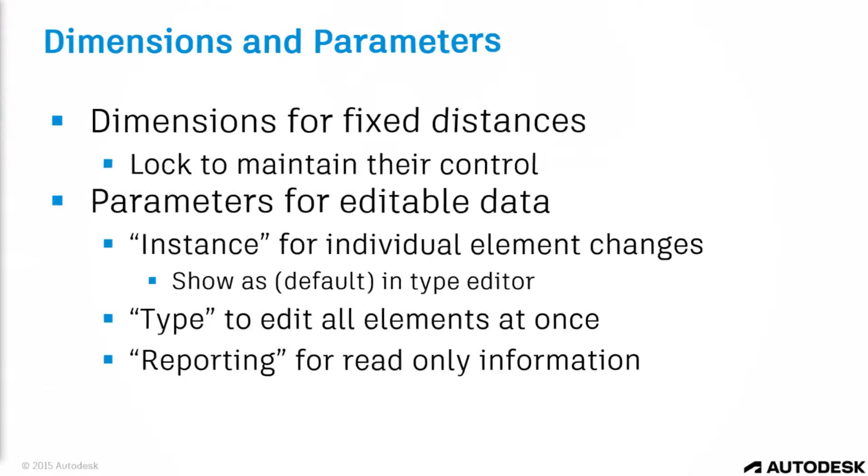So geometry, this is the object you place in your family, such as extrusion. Let me add some information regarding geometry. There are geometry types like solids and surfaces.

Revit works best with solids because they're easier to handle and control compared to other shapes. We have base shapes like cylinders and boxes. Extrude means it gives thickness.

If you have a shape, and you extrude it, it produces thickness. That's extrusion. Blend combines two different shapes, I'll give you a sample, okay?

Revolve rotates a shape. Sweep creates a shape on a path. Sweep blend creates two shapes on a path, okay?

So to make this easier to understand, let's go to the Revit file. Let me open my table tutorial to give you a brief, short sample on the shapes. This is the table tutorial.

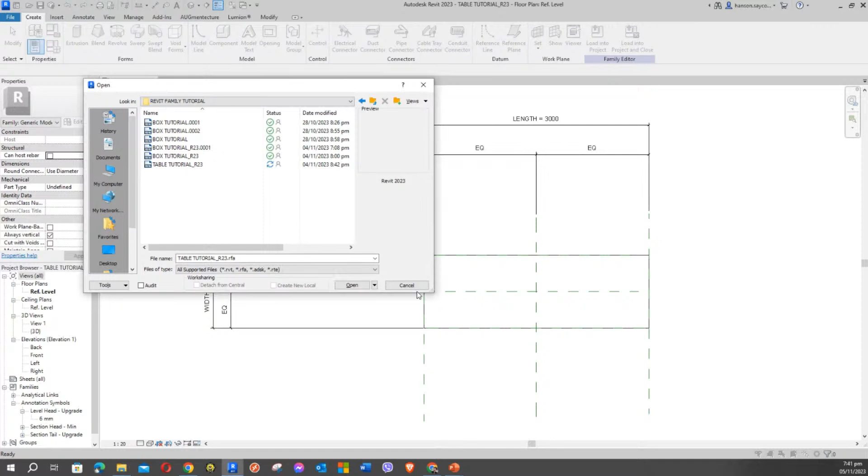My work from yesterday wasn't saved. Let me open my file again. So yesterday we added legs to this. Okay, I'll add that later.

For this sample, let's start with basic shapes for creating geometry. We are under the file named table tutorial, Revit 2023. This is the 3D view. For example, if we need a basic shape, we create an extrusion.

Once I click extrusion, it will ask, or by default, it uses the work plane, and we can see the work plane highlighted in blue. That's where our plane starts, the starting point. But we can also set a work plane.

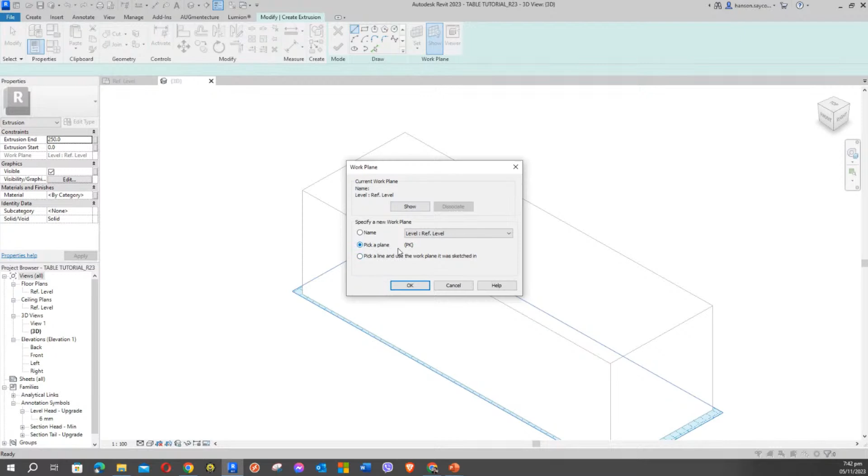If we click set, we can pick a plane, maybe I'll use this one. Notice that's the work plane now. Let me zoom in a bit just to give you an idea. This is the work plane, on top of this box.

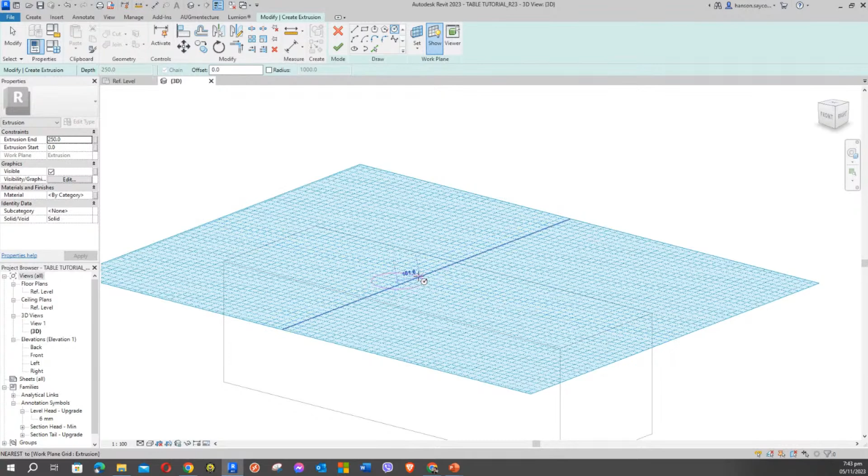Now we can create a simple extrusion. The basic shape can be lines or a series of lines that need to be closed, or we can use a rectangle, depending on the case, or even a circle. Once I close that, it's there.

By default, it starts from the plane and ends at 250, depending on the setting, but I can modify that and apply. Once we click OK, we have the extrusion - once there's thickness, that's the extrusion.

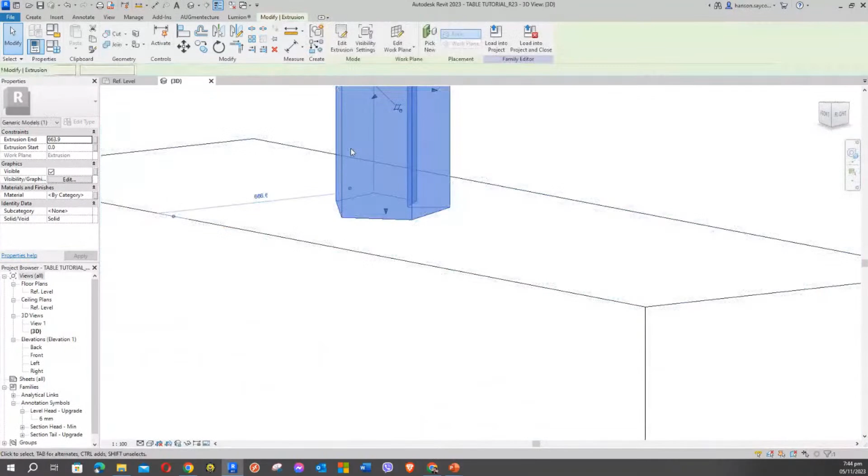So shape plus thickness equals extrude. In AutoCAD, it's also called extrusion. In other software, there's push-pull, similar concept. So that's the extrusion. How about the blend?

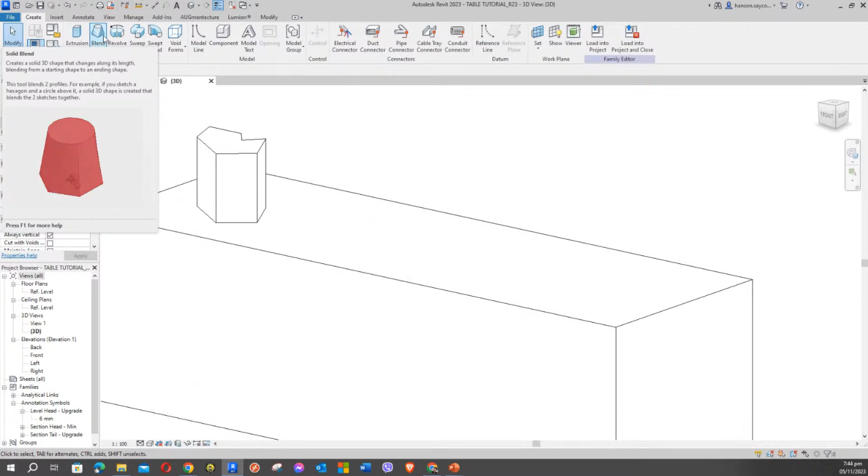Blend is creating a shape, but we have two shapes. Once I click, we're now editing the bottom shape. I can create that.

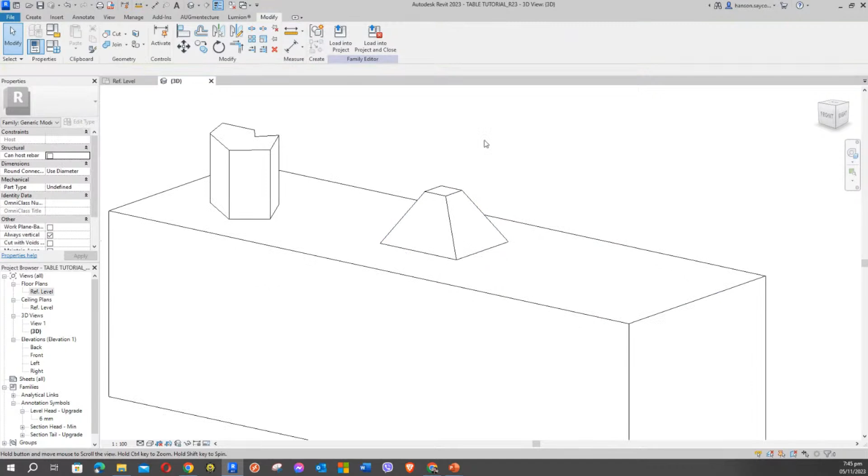If I need to edit a top shape, it's better to be in top view. I'll create the top view shape - this is the bottom and this is the top, and then I have some height. Once I click the checkmark to finish the model, it combines the two shapes.

So that's how it becomes a different shape. You can also modify it if you don't want that shape. To avoid getting misaligned, I'll just go to the top view and create this, and let it align there.

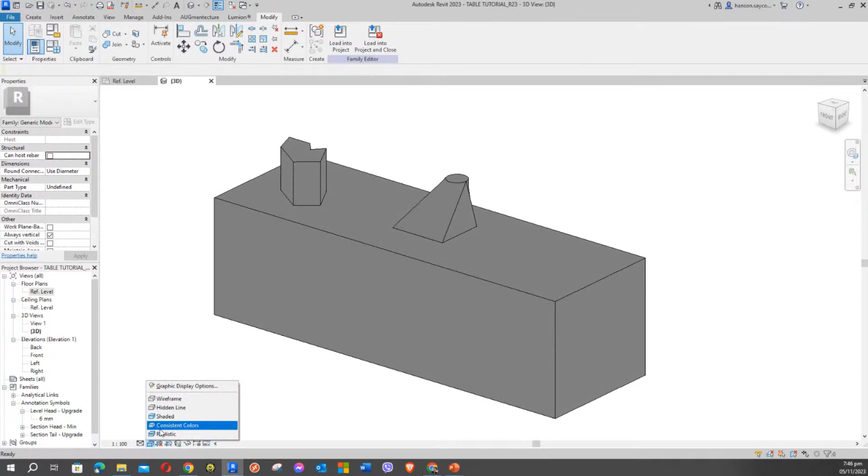I'm just changing this from wireframe - you can change this to hidden line, shaded line, consistent color, or realistic. But it would add to the memory load when you create shapes that are heavier, so using shaded or realistic adds to memory usage. I'll just leave it on hidden line.

So that is the blend. This is the extrusion, this is the blend. How about revolve?

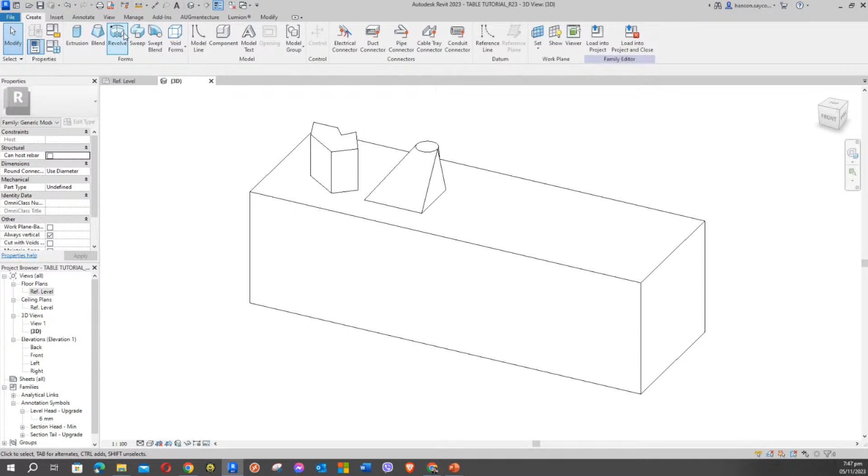Revolve creates a 3D shape by sweeping a 2D profile around an axis. So it's there. For example, if I go to the front view, I want to create a shape here.

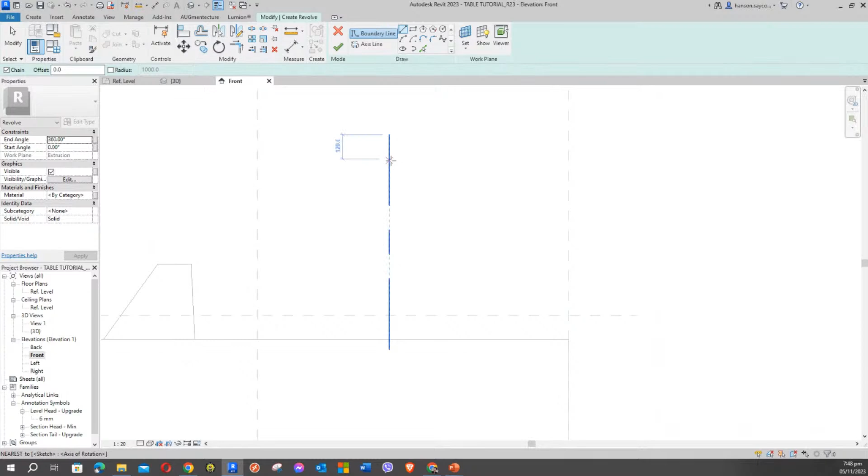I'll create an axis line first to define the boundary - it's like the mirror line. Then the boundary - for example, I'll just make some shape here.

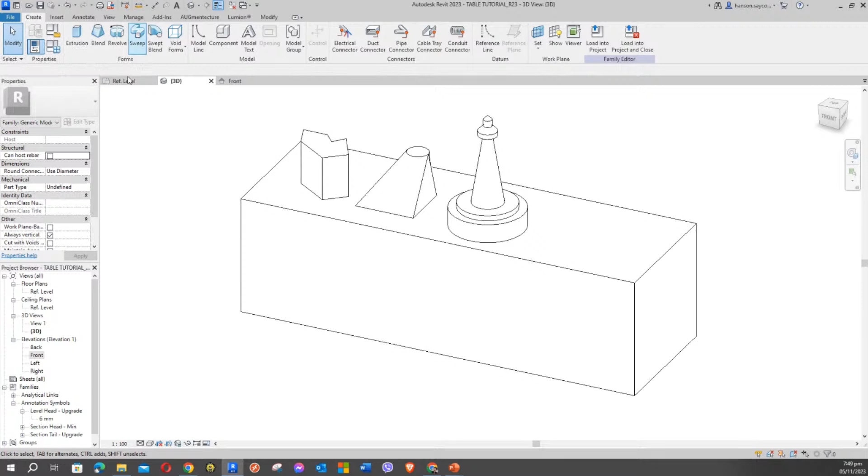Just click sweep, and it would ask for a path. Either we can sketch a path, or we can pick a path. I will just click pick path and edges, so it will be around this table or this box, to rotate the profile from there.

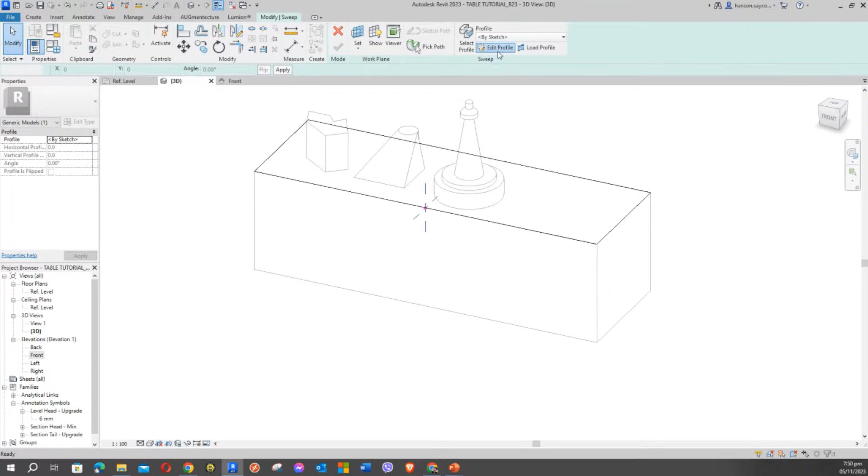Profile means it's just a 2D line that's closed. So I will just create one profile. Let's add a little curve, just the curve or the arc. Once I close this profile, then it will rotate like that.

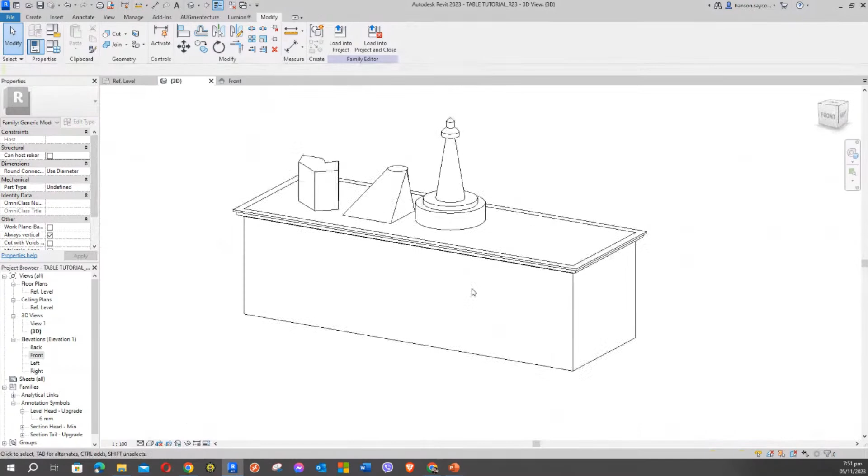To finish the profile, it will be like that. That is a sweep. So of course, this is dependent on the edge of the box. Whenever the box changes in edge or shape, it will follow along.

And the last one is the swept blend. It blends and sweeps along a defined path. Something like this, it's similar but with different shapes. There's a first, a beginning and an end, but it should be one piece.

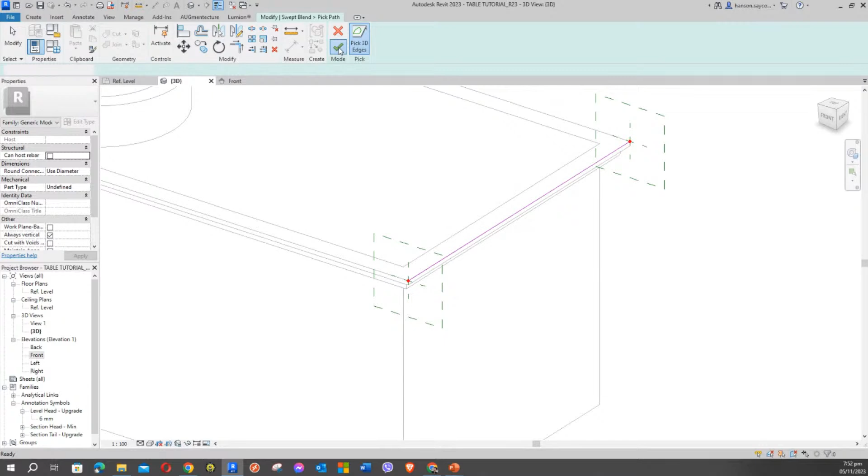For example, let's click swept blend, pick path. I will click this, so we'll have two profiles. Then it would ask me to select profile one. If I click this and edit a profile, for example you have this profile, then let's add another profile here.

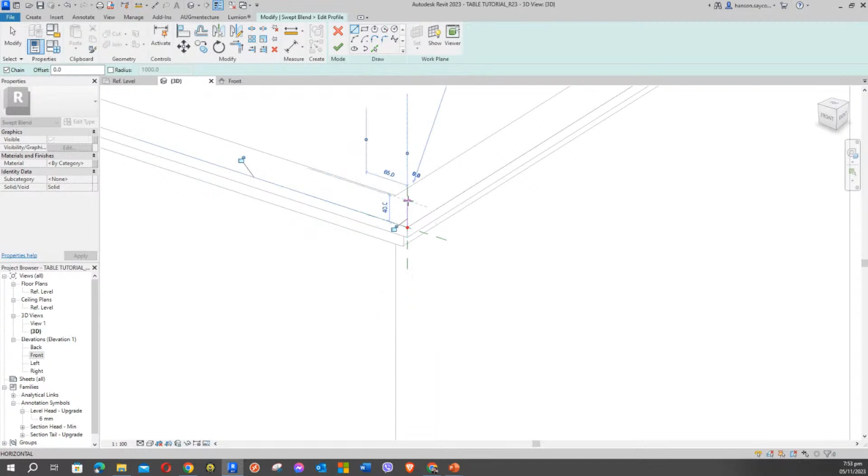Let's change the shape. This one is okay. So this is profile 2. Let's see what happened. Let's curve one of them, I mean just the slope. So it would combine those two shapes.

Once I'm done, that's it. So the shapes are different, in one path.

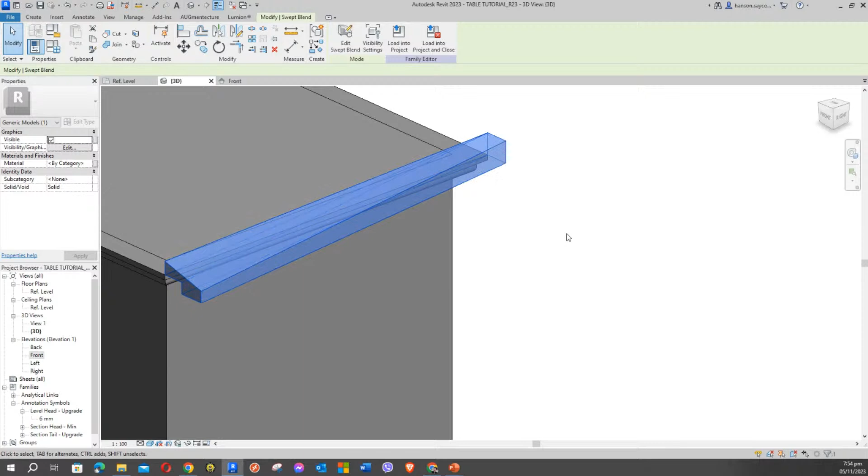So that's the basic shape editing. And then we have some other forms that you can add.

Void, actually, it's just the opposite of extrusion, but once you put a void on an object, it cuts a hole into that object.

For example, maybe I can create a void extrusion from this, let's see, extrusion here. Once it's defined that this is a void, it cuts into that object.

That is basic shape. Now you can use this in doing and creating objects in the Revit family.

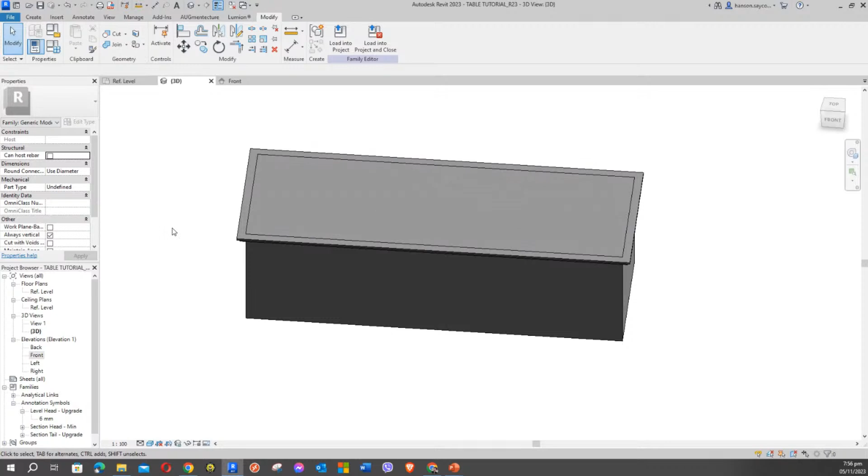If you have some questions, you can shoot them so I can read them while we're doing this. Type your question now, because what I'm going to do is, on the fly, explain quickly how I'll add my legs since the box, the legs, got lost. I don't know why, I probably didn't save it.

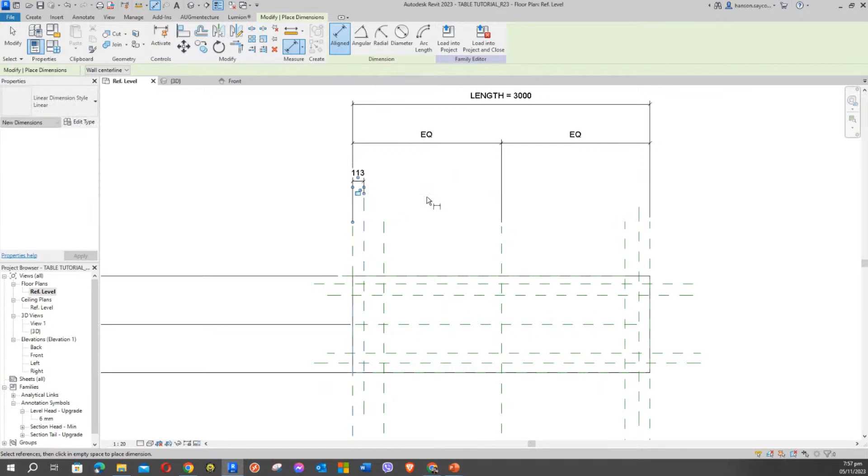So lesson learned, always save your work. Right now I'm creating a reference plane offset for the side of the legs, and another reference plane for the size of the legs, the thickness or width. After that I'll click this, this is the side offset, so I'll just adjust that side offset.

Okay, and another dimension for this and that. And another dimension, just need this dimension from here to here. So I need to create and assign that to a leg, this leg edge offset.

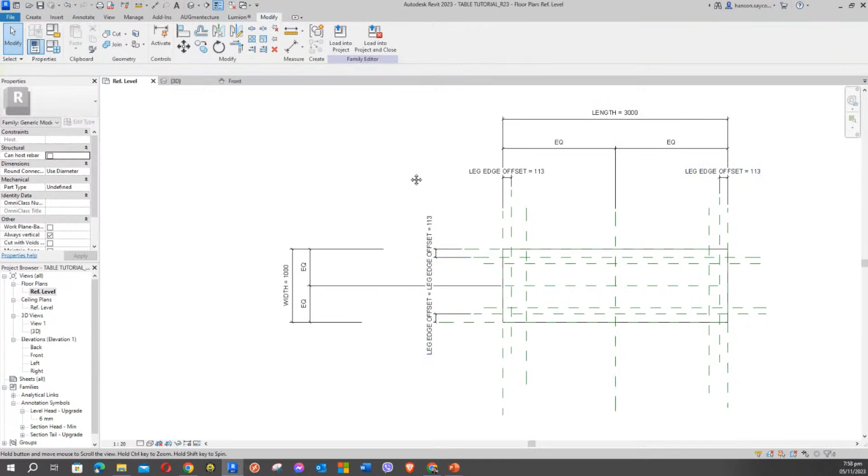Just to assign those, I'll select this and assign the leg offset. Now to check if that works, let's say it's 50, apply. If that moves, it means it's okay. I'll rename this as my table, and delete the others for now.

Delete. I'll move that table there. And then, so that's the thing I did yesterday.

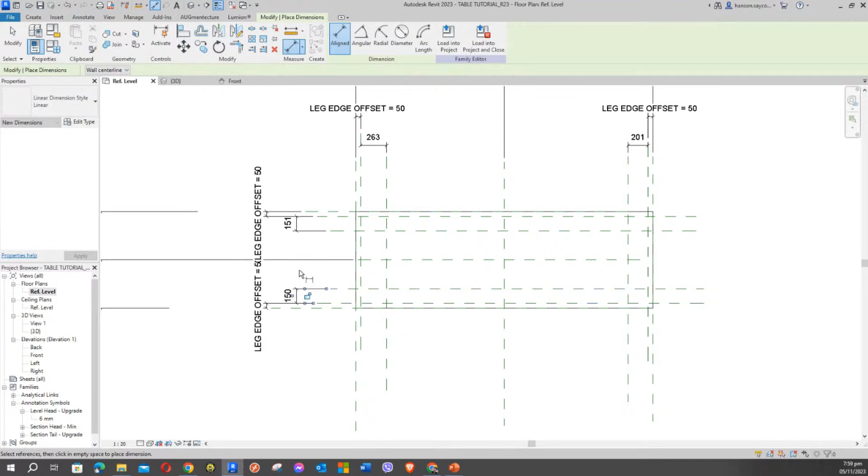I'm going to assign the size of the legs. So from this edge to that edge, that will be the leg size. So I need to add another parameter called leg size, and assign the rest to the same leg size.

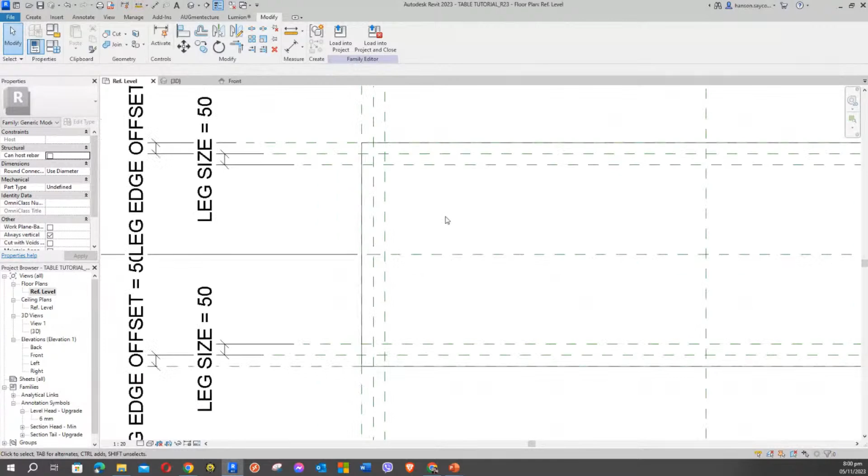Leg size. Okay, let's adjust the leg size to 50. If that works and everything is okay, then it's fine. So that's our imaginary legs here in the middle.

I need to create an extrusion, and I'm going to lock this so it stays locked. So I need to create 4 extrusions that are locked. It's important that they're locked because if you miss a line that isn't locked,

sometimes they will not follow the shape or the location. So we need to lock that. If you're confident, I can finish that and it would end on the extrusion at 500. So the height of the legs will be 500 by default, but we can define that. So these are the legs now.

Let me just go to the front elevation. This front elevation, just to verify this is the legs. Okay.

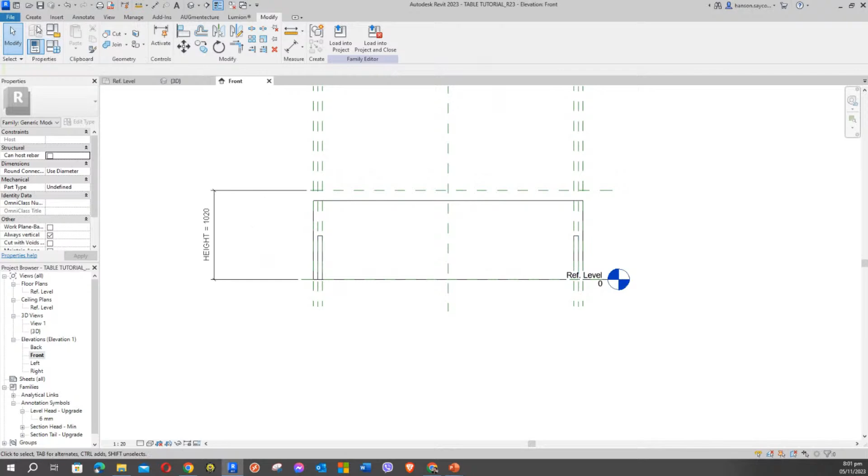Now I'm going to create another reference plane on the front view. This is for the height of the leg, so it's the leg height. I will just create another dimension coming from this reference level to that, and I will call this dimension and add another parameter, and we'll call this leg height. So that is the leg height.

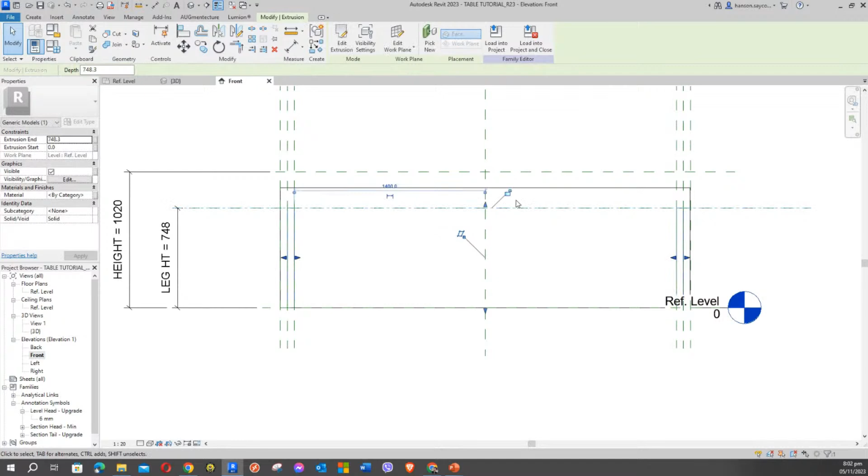Now I need to lock these legs. So, these are my legs. I will just move it, and once it reaches this reference plane, I'll constrain it, lock it there. So now it comes out. It's locked. Now, to check if this is working - let's see, if I change the leg height, let's say 800, it should follow, so it's okay.

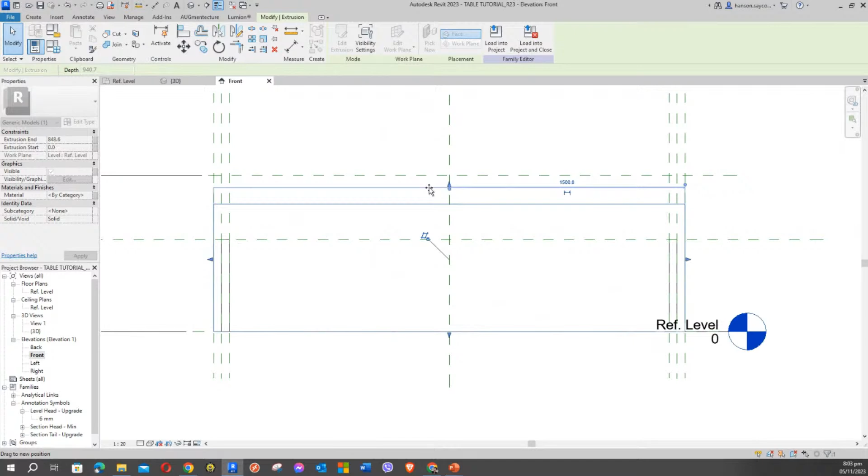600. Okay, so that means it's fine. Now, one thing - the height of this is the table height. It's not locked yet, so I'm going to lock this and click that. Just to check again, if I make our height 1,000, make it 1,500, if it follows, then it's okay.

Now I would like to make this box the table. So I'll remove the offset at the bottom. I'll raise it, and then I will constrain this to that - to that height, the leg height. That means the bottom of this would be the edge of the table. So I'll just click it.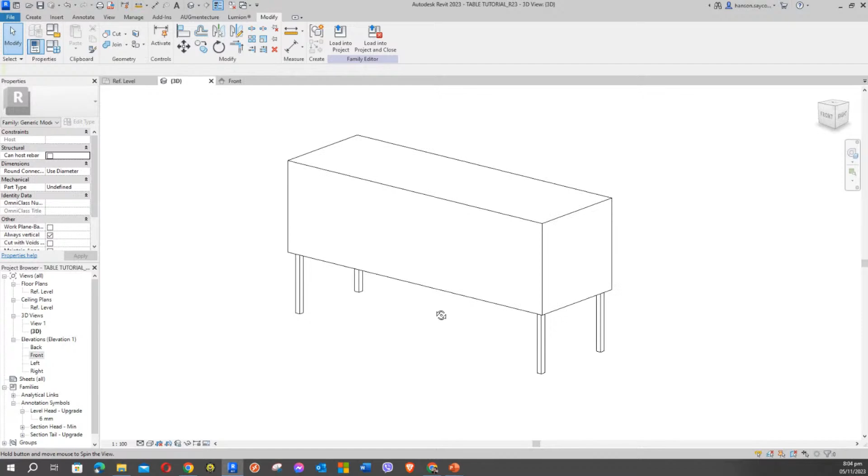Just to verify if it follows. Let's see, let's see. So just to check the flexibility. Okay, let's go to 900. Let's go - the height of our leg is 800. So it's okay, it follows.

So I don't have a problem. What if we offset this to 100? It goes in, so that adjusts. And then the leg size, let's thicken it, 100. So you can see, we're putting those parameters to make it somewhat flexible. So if nothing funny is happening, it means it's okay. If it's okay, then it's good.

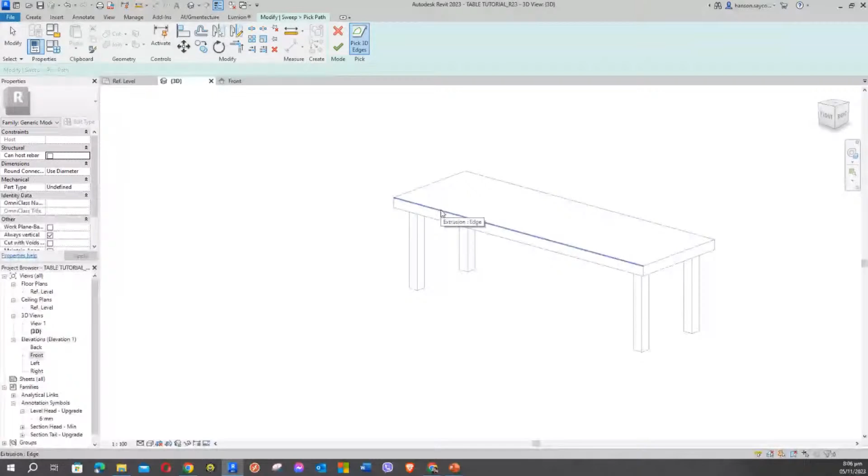Now we can add some other details, like we can create those extrusions - a sweep. We can create a sweep from there and have those sweeps around it. So the sweep is dependent on the top edge of the table. So whenever the table changes height, it will just follow as long as it's looking for these four edges. Now, if the edge changes or becomes unusual or the edge is lost, it means the extrusion - I mean, the sweep will fail.

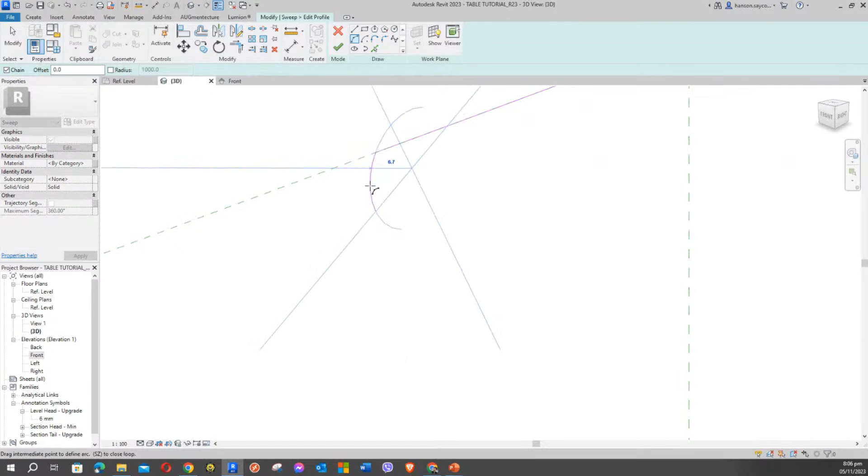So it will disappear. So I will just make something simple - a simple shape like moldings or something like that. It should be closed - there. The profile needs to be closed. So once that's done, it would have some design.

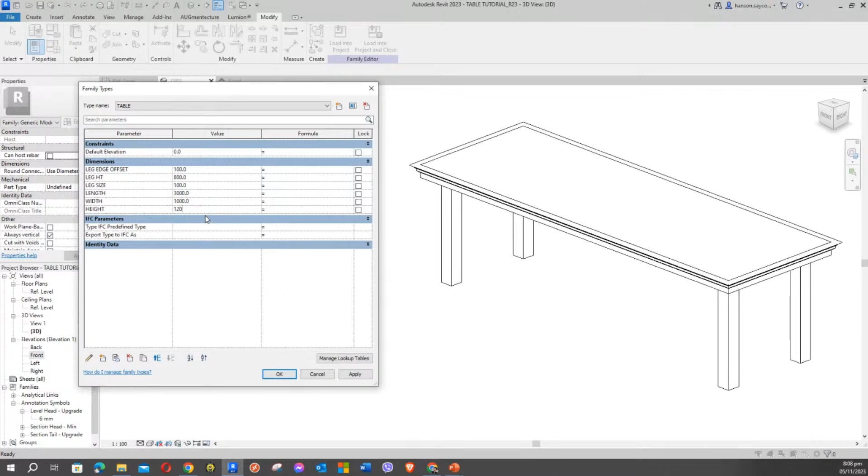So let's check if it follows. Just a little bit. Yeah, if our height changes. Okay, so it does follow. So it means it's flexible. And then we can use that.

Let's use 50 - leg size is 75. Height is - let's make the height 900. There. So it's flexible, right?

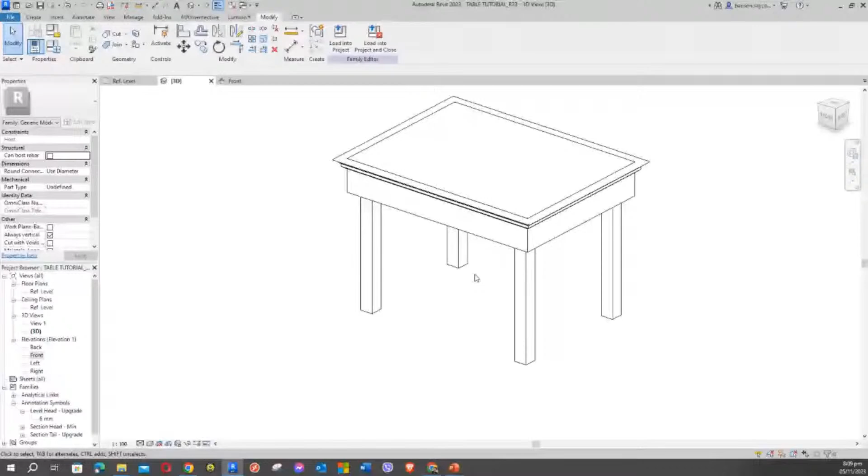So there's a warning: extensive use of large models can affect your computer's memory. So as much as possible, we discourage too many curves, too much detail, because the file gets heavier as the information increases. What is the ideal size? Usually, it depends on the shape, depends on the model, because the model can go as big as possible.

So what is practical? As some say, just use boxes as much as possible - simple boxes with extrusion. If possible, that is okay. Only when needed, if you really need to add details like curves, that's unavoidable because as the work progresses, you will add a lot of details.

For example, if we're looking at light fixtures - the lamp - it can be simple, just two lines of a circle or an extruded circle, like a thin cylinder. So we can represent that as a lighting fixture, depending on how you are looking at that particular model or drawing. Let's just get an example to make it clearer.

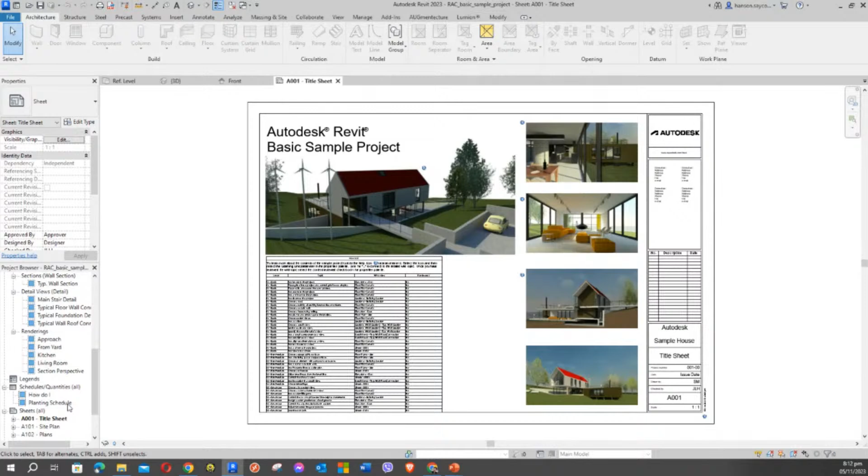Kasi by default, so if I'm going to get, hopefully if I get some, wala siyang lighting fixture. This is the plan, site plan.

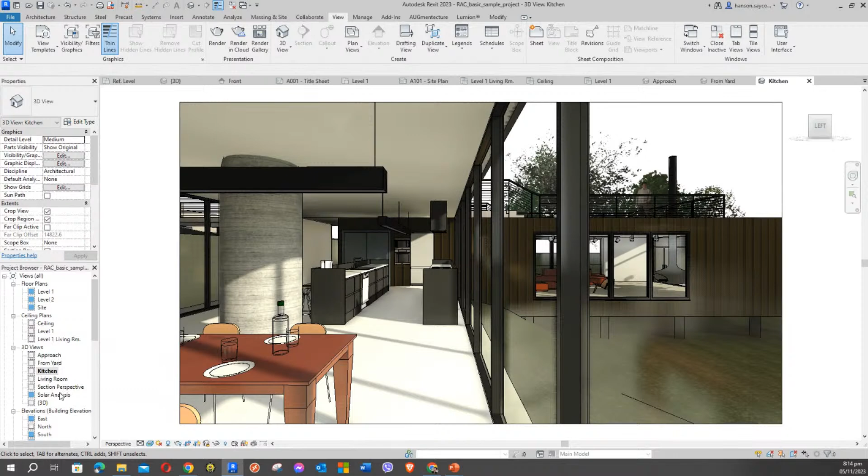So walang ceiling plan. Tignan ko lang yung view niya. And let's see. Mabigat. Wala akong makitang ceiling plan. Wala siyang ceiling plan.

Create lang ako mabilis ng ceiling plan. So I'll just create a ceiling plan on this part. So yung height ng ceiling ko is 2.7 from the finished floor. So I'm assuming it is there already.

And then I would like to insert a lighting fixture, kung ano yung meron dito. Okay, so it says that this one. Hindi lumalabas yung...

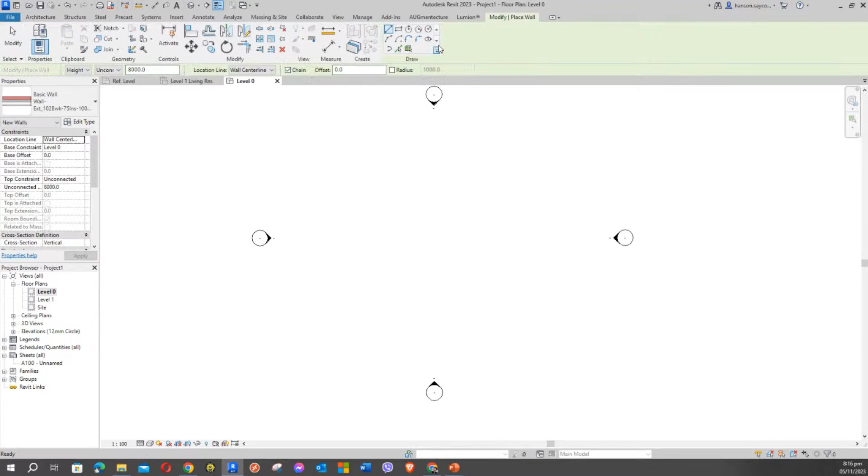I'll just create one quick project. So I will have some wall, and ceiling. Yan, may ceiling na siya. Insert lang ako ng lighting. So wala siyang lighting.

Load lang ako just to give an example on the extensive use of a large model, an example of yung mga mabibigat na file, which can be malaking effect once you're working with project such as multi-story or building, and then you don't need some, just say, lighting.

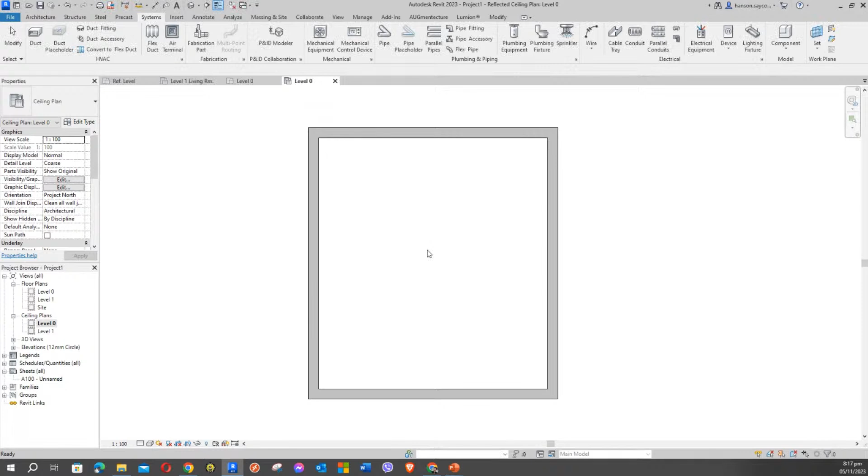Okay, this is a recessed can. Sige, tignan natin. So this is how a recessed can. Well, if you're dealing with some details sa Revit, how it was presented is yan lang, circle lang.

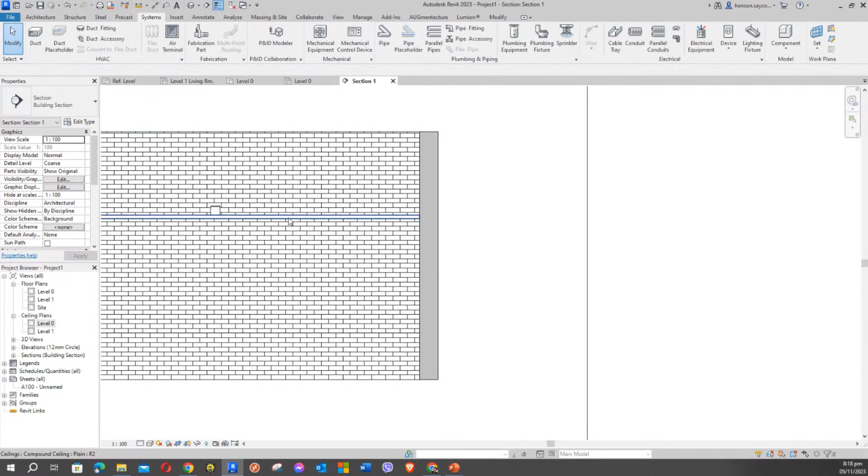And then let me go to the section. Yung representation niya, go to view. So ito yung wall ko, ito yung ceiling ko. Palitan ko ng plain lang yung wall ko. Okay, so ito yung recessed can, so nakapasok siya, simple lang, walang masyadong arte. So that is how it can be represented, lalo na hindi mo naman kailangan ng sobrang detalye.

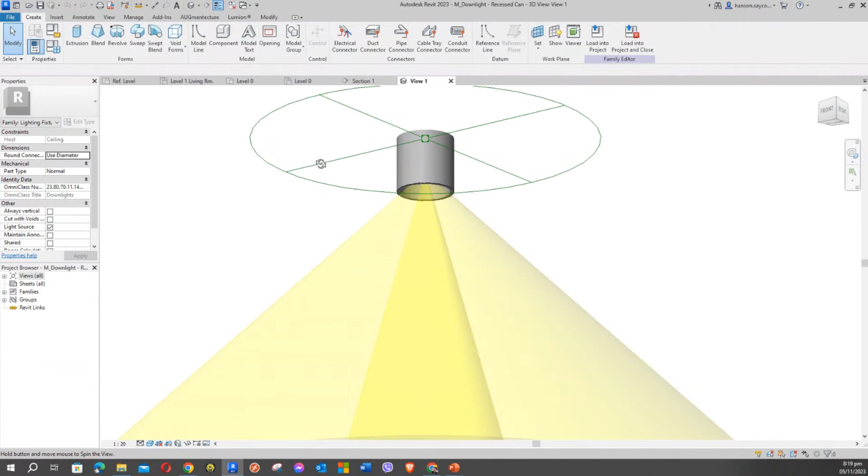So if I'm going to the family, so ito on how this recessed can was made. So in-extrude lang niya yan, and then it was extrusion lang din yan, it's like a pipe. So that is how it was represented. Pero meron namang sobrang intricate at sobrang detail na minsan hindi mo naman siya talaga kailangan.

Let me just say a sample of a light.

You can always refer to yung sinabi ko kahapon. You have those, kung mapapansin nyo, those details na pagka dinownload mo, let's see. So yung file pa lang alone is 1.2 MB na siya. Which is for me, pagka ganyan yung mga files, hindi ko siya i-recommend talaga na ilalagay mo. Tignan natin kung gaano ka.

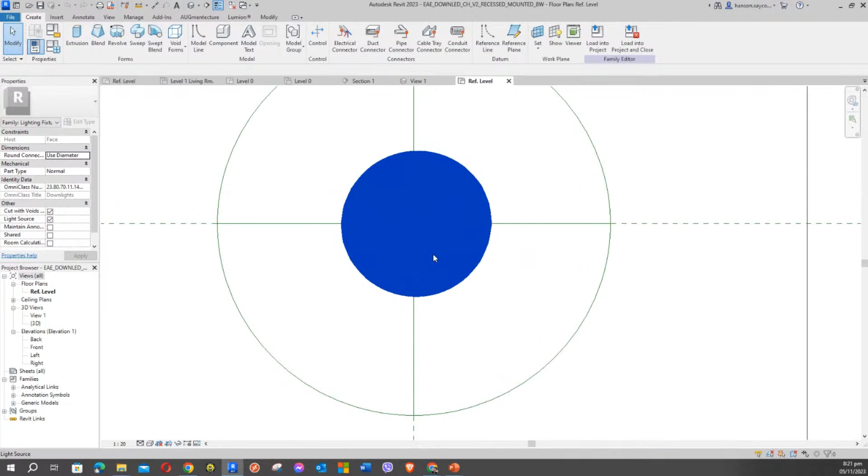Kita nyo yan, yung 3D view. Yan, so you have added some lines dyan, sobrang dami na kung hindi mo naman kailangan ipakita yung all of those details. So don't do that.

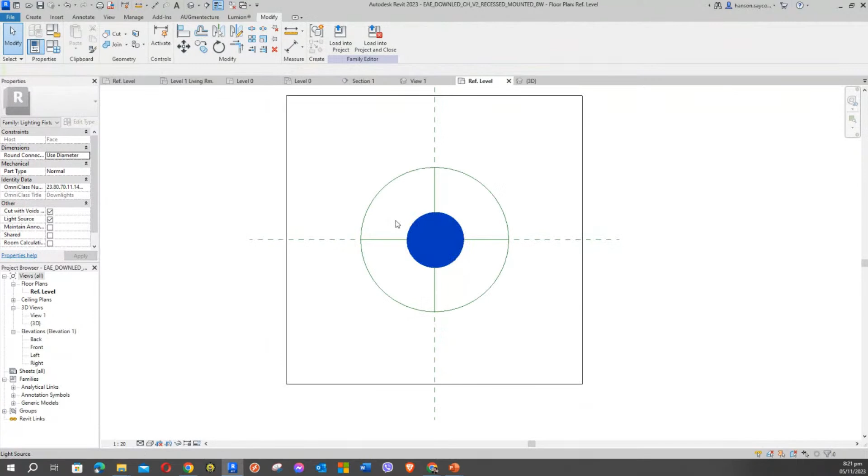I might as well, kasi if you have 5 or 10 of these sa isang bahay lang, so it would add, because as of now the details of this is like it's already 1 MB. So padagdag ng padagdag, unlike this file is only 288 kilobytes. So yun yung difference niya halos.

Sobrang laki ng difference. Kaya makikita mo yung loaded sa Revit samples, it's just 200, 300 kilobytes. Kaya mas advisable na yun yung gagamitin mo, dahil most of the models coming from some other website napakabigat. Not unless you are adding details or section na kailangan mo talaga ipakita yung mga maliliit na small, super detailed parts of the light.

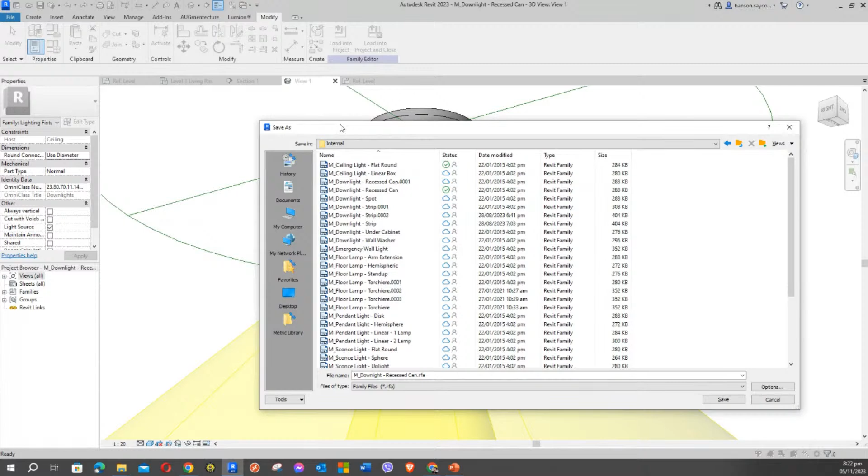Pero kung hindi naman yun yung scope nyo, might as well just go. Kung mapapansin nyo, all of these, let's see, ano pa ba? Ang madetalye, furniture, like furnitures. Mapansin nyo yan, 200 kilobytes, 100. So hindi siya umaabot, even we're talking about chair, so nasa 300.

So hindi siya practical na paabutin mo yung isang model ng 1.2 MB, 1.1 MB. So it would add a lot of power or memory sa paggawa, and then loading that and saving that, so it would take you a lot of MB sa storage. So that's a practical solution, just make it simple. Kung kailangan mo siyang gawin, ganun lang, make it simple lang.

And also, ang rule of thumb ko din dito is if you're looking at a certain detail, for example, halimbawa yung bintana, maybe you can add a lot of details from the windows there, yung mga latches, yung mga hinges niya, yung mga iba pang section ng drawings mo. But I would suggest mas simple, mas maganda, and then you can just create some other detail na hindi na siya kailangan maging 3D na, because you can add details sa mga 2D lines lang.

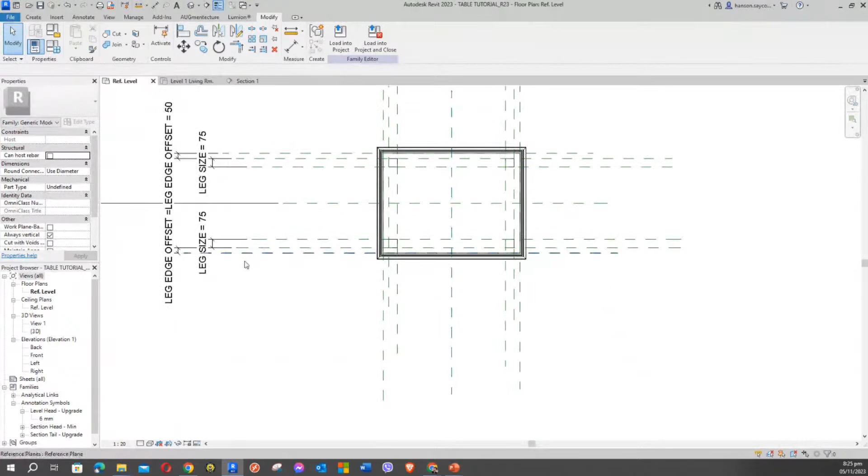Let me give you an example. So I have this table. I don't want this to be shown because it adds dimension, added memory, added kilobytes. So how do I represent this on elevation?

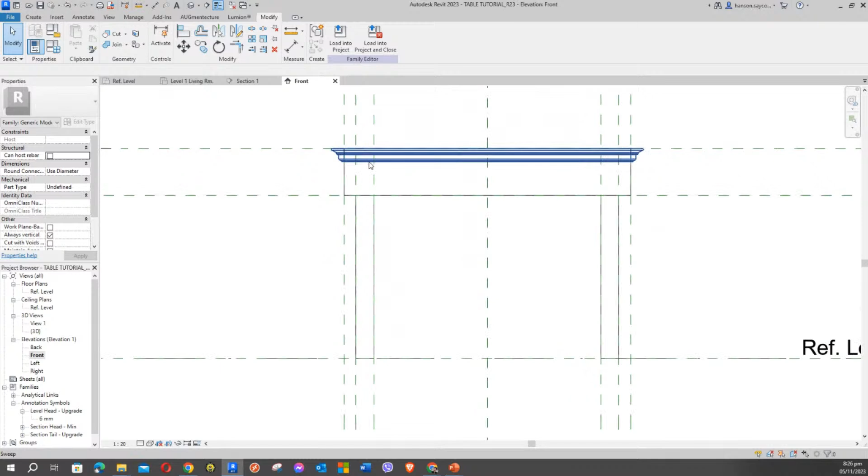I'm talking about a scenario where you don't need to change the height and dimension, it's already defined and fixed. If I look at it as is, it would be fixed, so I don't need that.

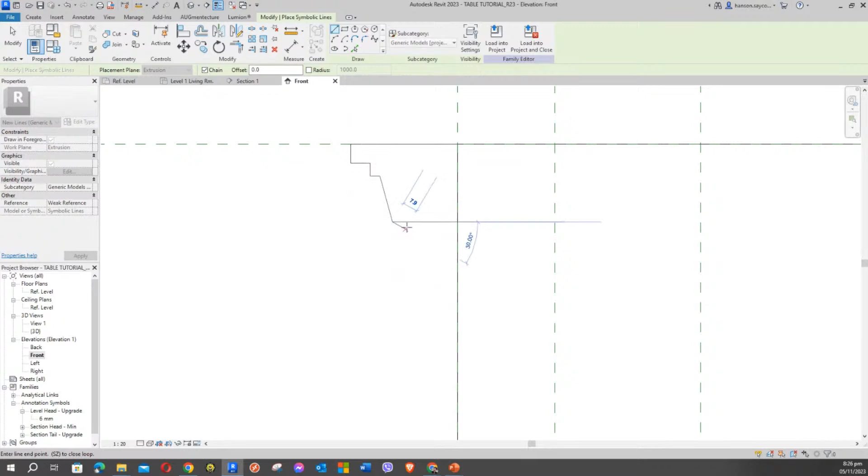Instead, to represent that on the front elevation, what I can do is create a symbolic line representing that. This is applicable in front elevation only, just to represent that it has those shapes, but it would only be presented on elevation.

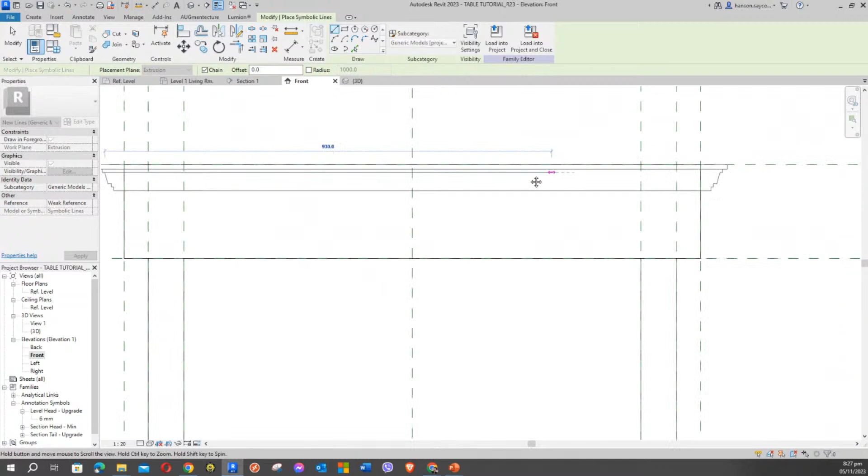Even in 3D, once you see it, it still looks the same, but it's presented on a particular view once you create a section or elevation here. I'll just load it into the project, then we can see how it looks.

Let's see. Again, it looks like that, but in front view you will see it differently. Let's try to load this table, so it's just a table.

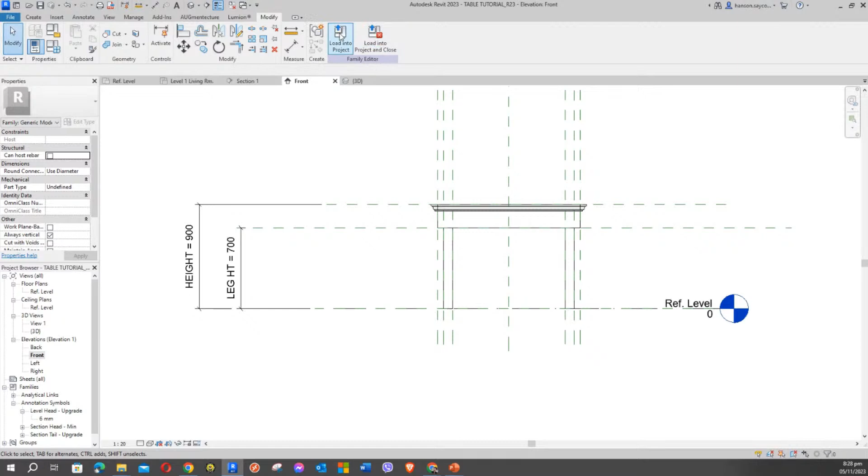Load the project, this is project 1. I'll load it here. So this is also the table, and that's the table. Let's look at the section, you can see how it was represented.

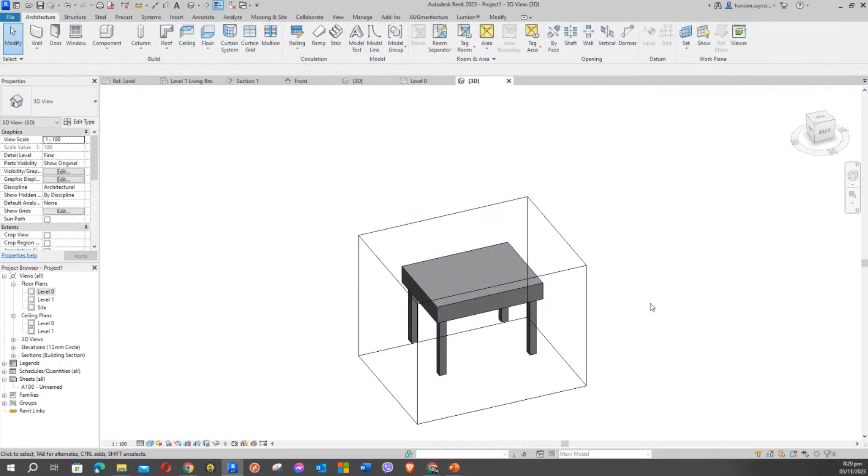But without compromising the file weight, which would otherwise look like it has added detail because you added that on the elevation. But technically, if I look at this in 3D view, it still looks the same in the project.

But it is represented this way because we defined some other things that make it look a certain way, like it has what's called moldings.

So we're essentially tricking the sections, to avoid adding a lot of unnecessary load to an object just to keep the file size manageable. Especially when using this with multi-story buildings with repeated details, if it's possible and feasible, then why not, right? So, those things.

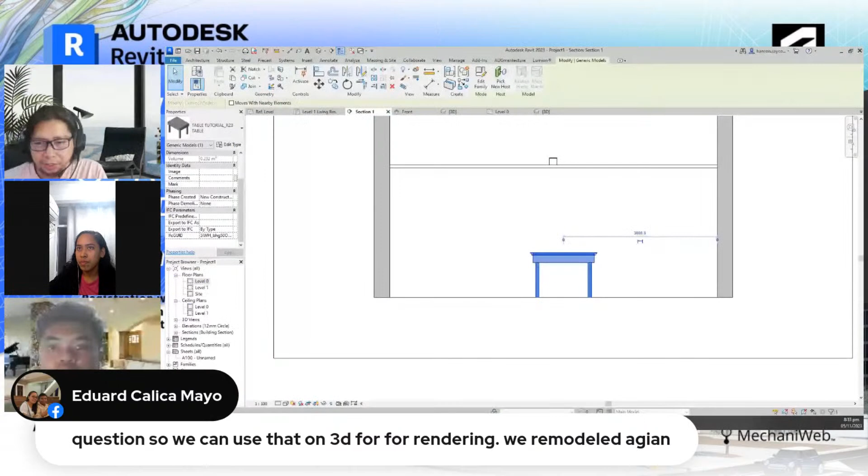Can we use it? Of course we can use that because it's already a three-dimensional object. I mean, you can render only 3D objects, so yes, you can use this.

You don't need to remodel it. But it depends on where you're rendering. For example, rendering here, I doubt you'd render in Revit. So if you want to export this to other apps, like Lumion or SketchUp, since this is already a 3D model, yes, you can use this.

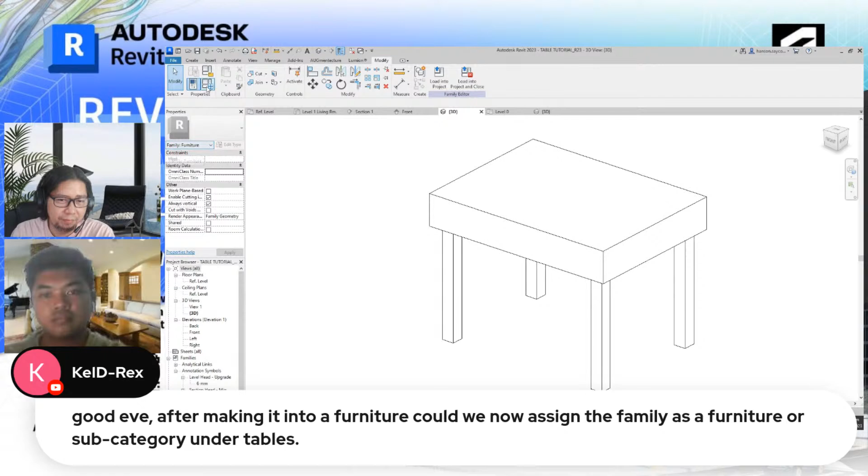So once we can click this again, dahil magkaiba sila ng template ang pinanggalingan, maaaring may mga walang information from this. Kaya yung unang step dapat, if we want to make this a furniture, so umpisa pa lang gawin natin siyang furniture. Tignan natin, once kinlik ko to furniture, mapapansin nyo, it will already magpapalit na siya as a family. Now this is a furniture family, and andyan pa rin siya, so it's good. Kaya pag load mo na ngayon ng file, I would save it and loading it on the project.

So let's test this. I will just overwrite this. So from the generic model family ngayon, ano na siya? Furniture family na. So it will be added na ngayon dun sa mga list of families. So your question, yes, you can replace or change that type from generic to a furniture family.

Thank you po sir. Other question po, yap I can be rendered but the thing is not detailed kasi in 3D wala po molding. Why not just filter? So 3D model ay nandun pa rin, just suggestion not deleted. Nasabi ni Mr. Mayo. So the reason, okay.

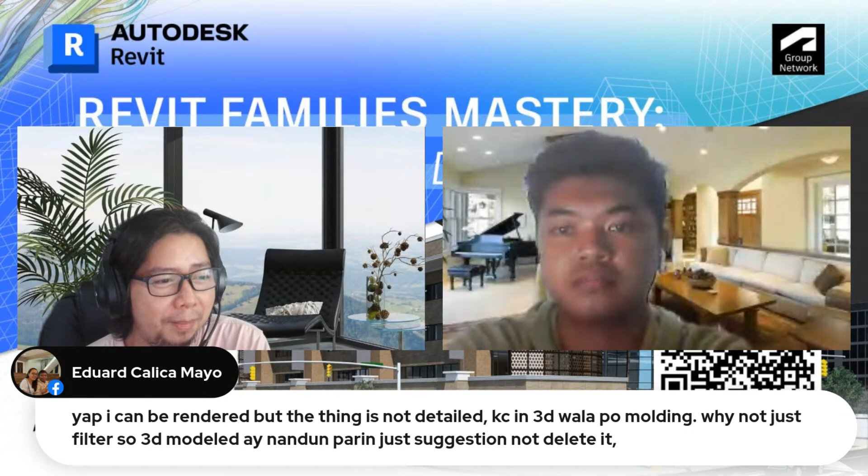Yung reason kaya kayo, para mababa yung file size. So if you like those details, you can always add that. Don't delete it kasi if you're using those details, wala namang babawal. Dahil if you turn that off, kasama pa rin naman siya. Because you have the option to turn off, to turn that on and not to delete. That is possible.

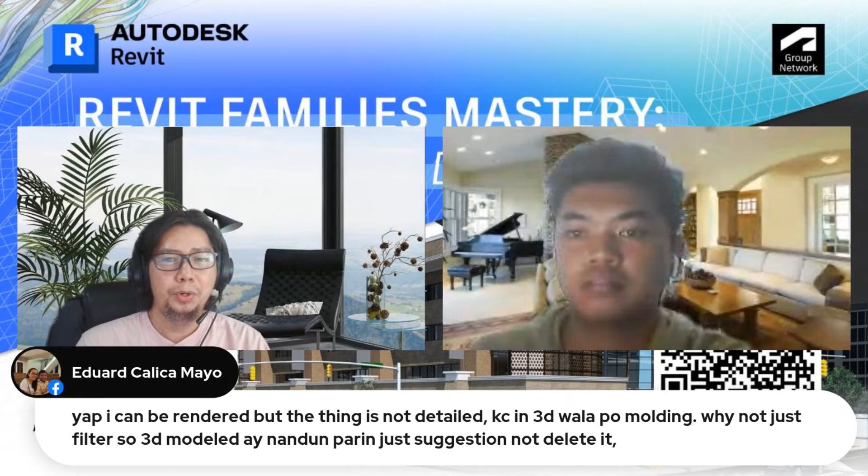Pero the size will be once you add those molding. But yes, of course, kung rendering wise, kailangan yun yung side na yes, bibigat yung kasi of course you want to have a nice models. You want to keep that. It depends sa purpose. Always think it, ang lagi mong saan ko magagamitin yung model. If you're modeling it for rendering, that's other workflow.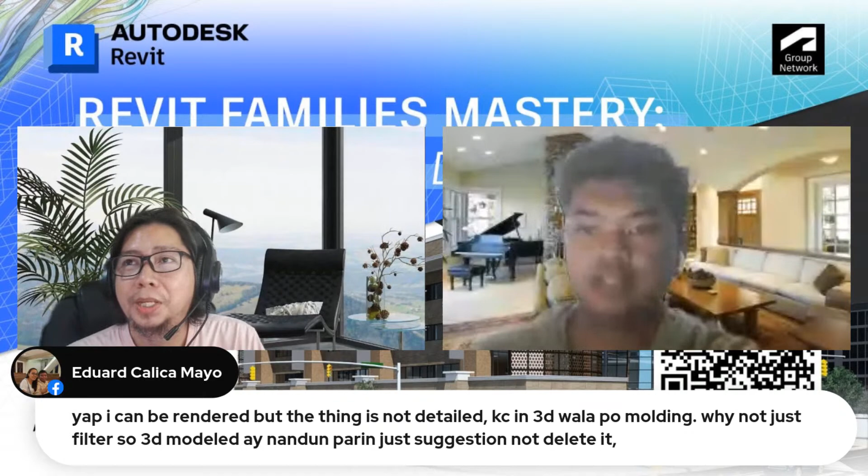Kasi ang purpose mo is to do the rendering, so you need details, you need a lot of details visually. Kaya kailangan mo yung mga information. But if you're not rendering, you're just doing detailing or CAD details, so medyo iba rin, you don't need a 3D model, you just need lines.

Thank you sir. And another follow-up question po for Mr. JM Calales kanina. So void is same as Boolean intersect command. Yun po yung tanong. So hindi ako sure sa intersect command.

Kasi dito, once you put a void and intersect on certain solid, so whatever is intersected, yun yung... so if that is what Boolean intersect command is, so yun yung maring ganun nga.

Okay, next question po. Follow-up question din po ulit ni Mr. Eduard Calica Mayo. Question po, how to minimize polyline 3D import model coming from SketchUp. Kasi 32K lang accept ng Revit. How to minimize polyline.

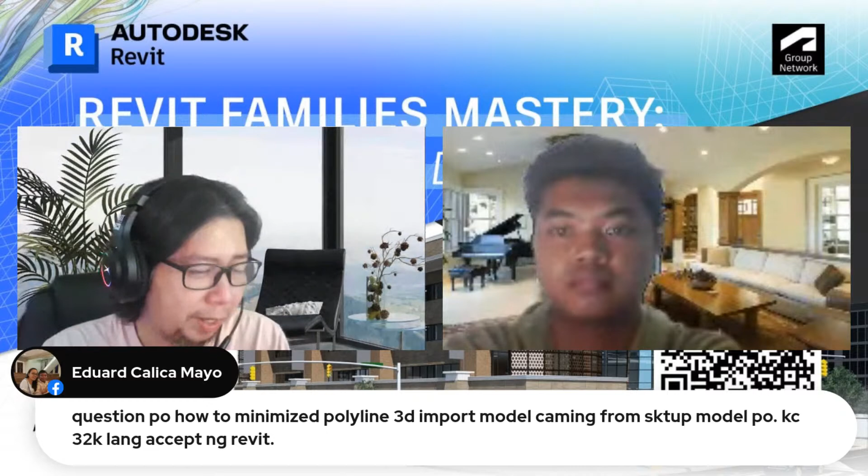I'm sure merong ganyan din ng SketchUp, or maybe a plugin from SketchUp can do that, to reduce a poly count just to accommodate a Revit family. Ganon. Okay.

Ito, for this, I still have best practice regarding the geometry. Only include useful geometry, visual identification. Tulad ng sinabi ko, what you need depending on the purpose. Always think saan ko ba gagamitin, or will I use this model or this object, or this 2D or 3D object? Ano yung end use niya? So if you're using it, katulad nga yung sinabi ni Eduard, if you're using that in rendering, of course you need 3D objects na detalye.

But if you're using that only on producing drawings or details, maybe you just need a 2D object na hindi mo kailangan ng sobrang bigat ng 3D, kasi habang tumatagal bumibigat yung file. So it always depends on the user, on the uses of that. Another thing is to limit curves, kasi pag nagkaroon ka ng curves, ayun na, bumibigat na yung object, and then it would slow the computer. Use native object as much as possible. Revit has provided those native elements, native families that we can use, not unless otherwise required.

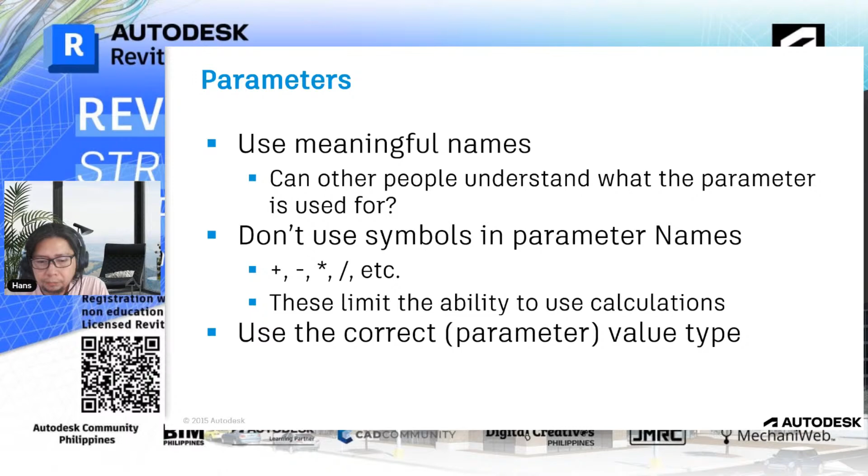Use the correct parameter value type. For types, every family needs at least one type. Create each type in the type window. Allow families to have multiple types.

So finishing up our final items, new families should be saved to the work-in-progress library. This is to have good quality checking and quality standard, quality control. If we have a new family, it should be saved on the work-in-progress library.

Then you discuss it, somebody would check it if you have quality control, test it, and once it's tested and okay, then you can move it to the project or to the official family library since it's been quality checked and tested.

And once done, you can put it in RMCI, which is the company library that we made. So if you have company libraries for the families, you can just move it there so it becomes official.

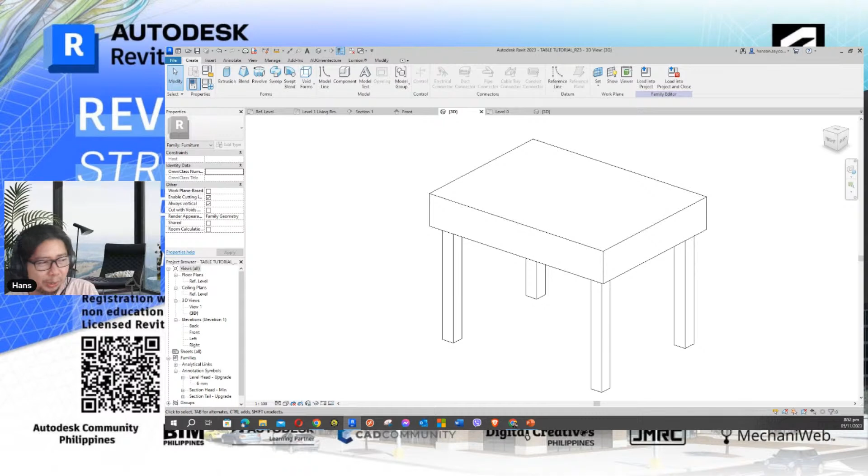And I think that's it. Now we can have questions, or if there's anything you want to ask me, go ahead. Or if you have other items you need to clarify, let's open our time for this.

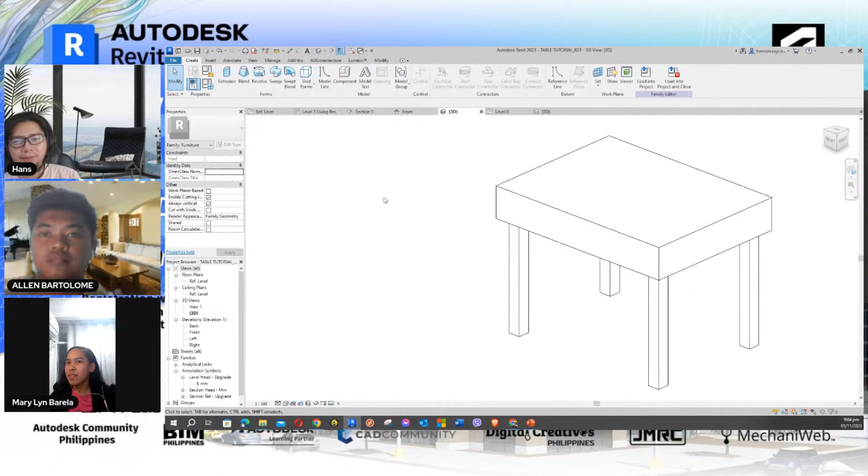So, meaning sir, are we going to provide supplementary materials for them? Once they've followed along and tracked that object. Check my screen - those who followed along, all of this, if they followed along, so that's the activity we're requiring.

So, all our viewers heard that. That's why it's called that - you really have to follow along. From day 1, you should be following along with Sir Hanson. But we are giving a chance for those who did not follow along during our discussion - as I said, you can go back to the replay, so you can do this final activity of Sir Hanson's and claim your certificate of course completion from this session.

So for that, once you're done with that activity, we want you to send your output to Autodesk Community Philippines at gmail.com. Let me paste that - here's the email you'll send to once you are done with the activity.

And for the deadline of this one, we'll give you time until November 30, by the end of this month. Because from this Autodesk Community Philippines account, the admin will give you instructions on how to get your certificate of course completion.